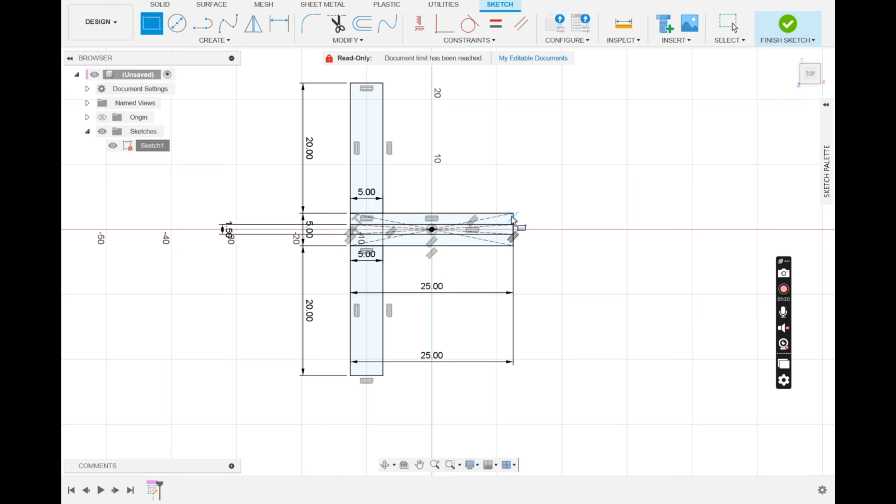The first step was to design and 3D print a small stand to hold the plate upright, allowing me to use a flatbed scanner. This provides a simple and effective way to capture the plate's shape before tracing it in CAD. What I learned quickly was that the two ends were a little distorted and didn't line up the way I thought they were going to.

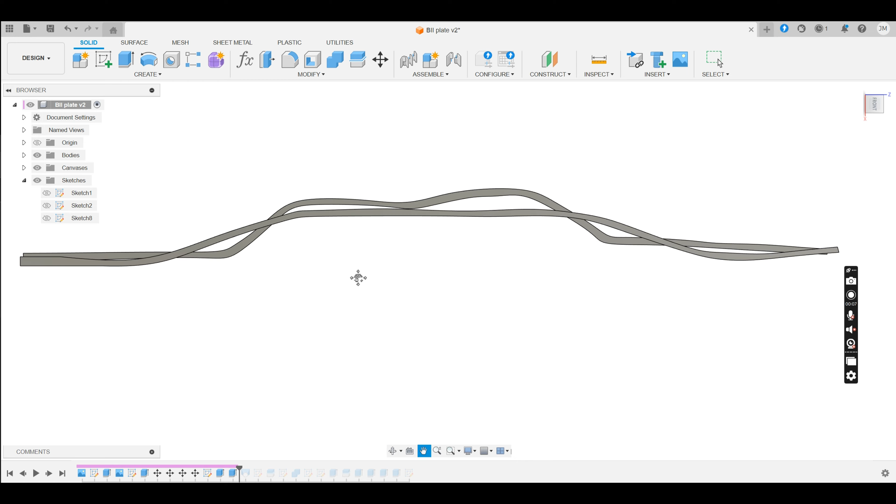So I extruded them to connect the two distances based on the gap I had measured and was going to try and figure it out as I went along. I knew I'd have to make some adjustments, but I figured I could play with this.

So I extruded it and then cut it in half because this big plate wouldn't fit on my printer. If you see right here how they're identical, it's because I made a mistake and printed one side twice.

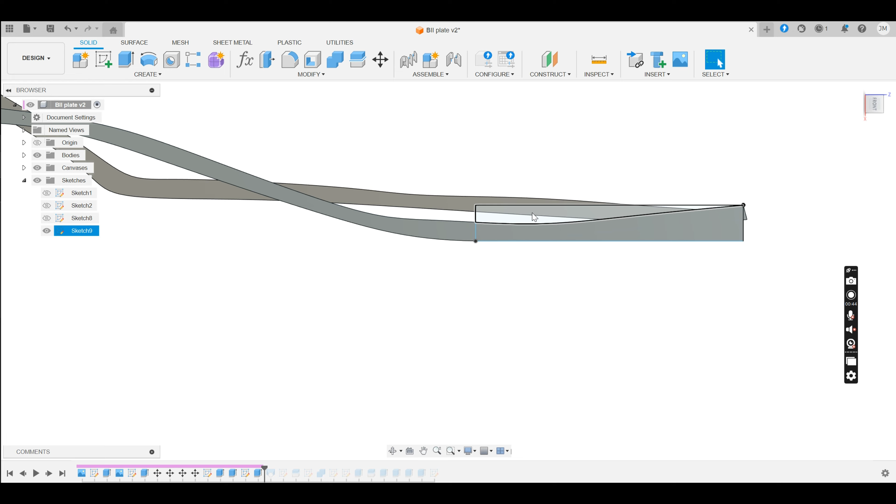What makes sense here is to follow the contours of the track as it is in place. To make it easier to print and make the design work better, I'm cleaning it up, and I realized I needed to make it a little thicker because when I printed the two pieces exactly the same, it was basically paper thin. So I made it thicker, and making it flat on top just made sense since it was going to be a plate going over it.

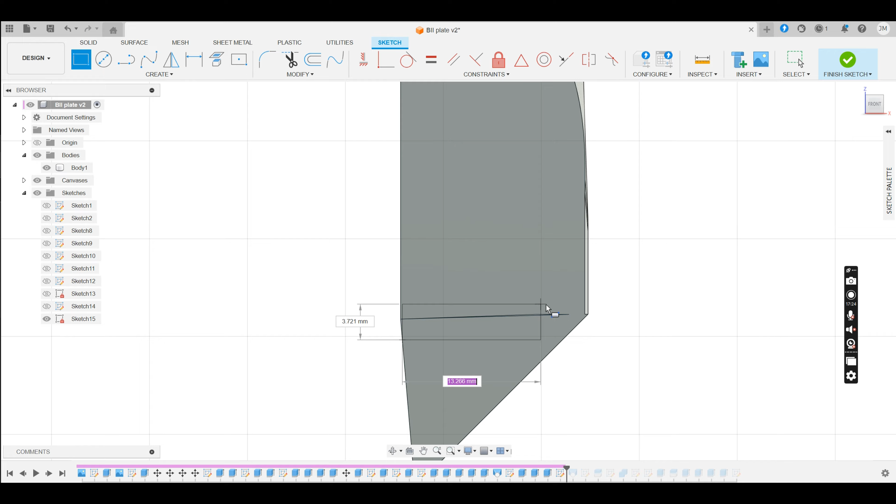And that's when I realized that maybe I was way over-engineering this and I could go with a much simpler design. Ooh, light bulb moment.

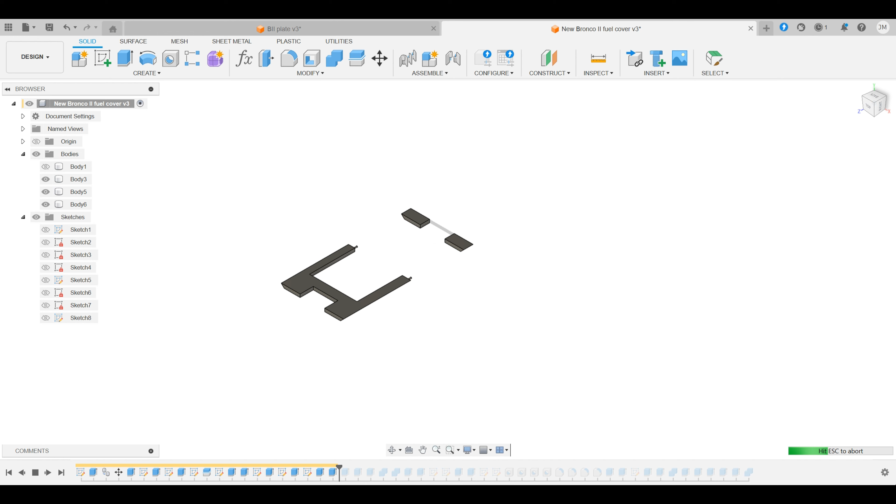So I threw out my entire earlier sketch and disregarded the plate I had taken out. I did some basic measurements off of the hole I was trying to fill and came up with a simple design that filled it with roughly those numbers. Then I created a design with two sections that would connect together and have a plug that would allow them to sit together but be spaced out.

This two-piece setup, slightly smaller than the measured hole, allowed me to position the ends flush against either side. By measuring the gap in the middle, I could determine the true overall dimension. I added that distance into the design, and I was good to go.

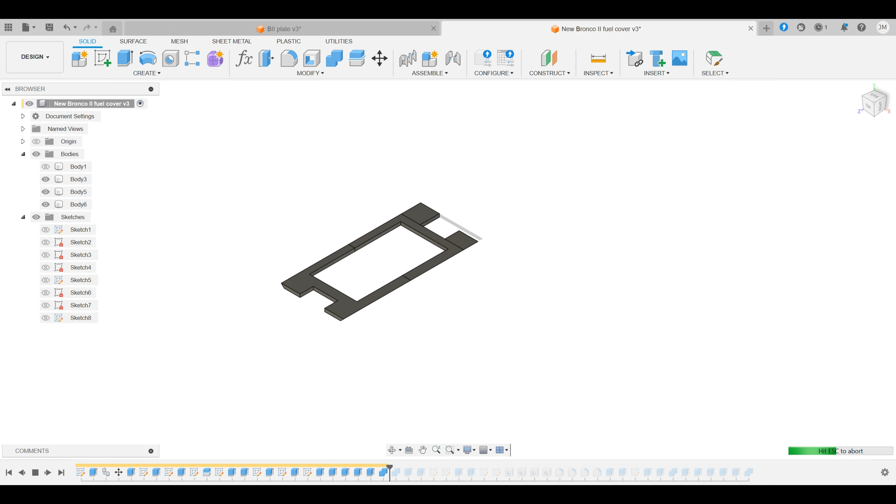I added the measured gap to the design at the midpoint, included a large registration tab to securely lock the two pieces together, and then added some screw holes for mounting. For no particular reason, I also rounded the edges before sending the final design to the printer.

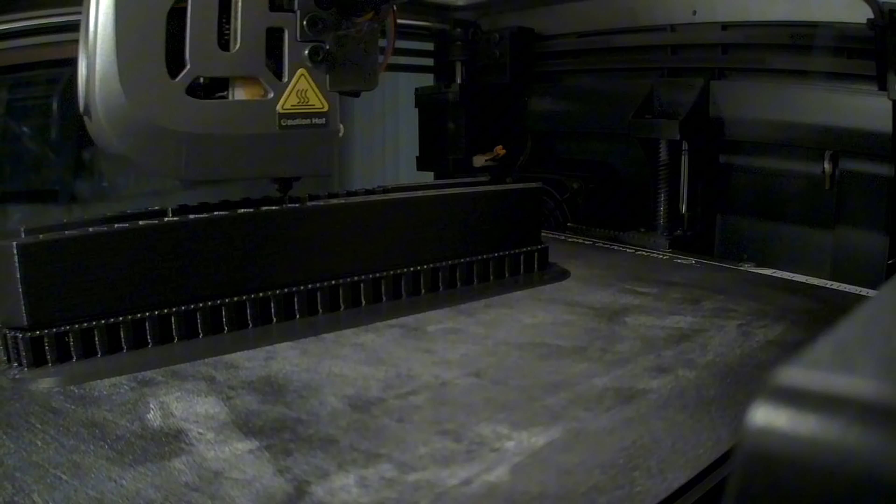Now, the first time it went to the printer, it failed about 20 minutes into it, so I had to start over. This print ran for about 8 hours. What you are seeing here is crunched down into just over 15 seconds.

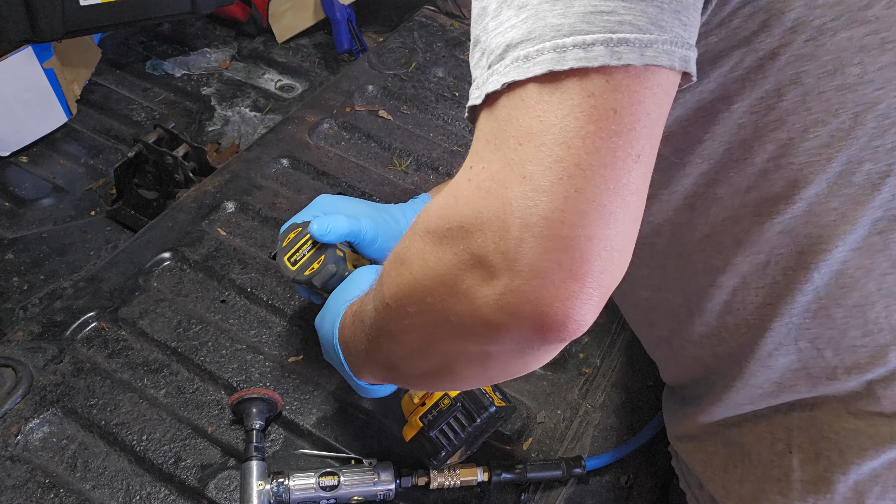This had a mix of RTV, household silicone, and Bondo. I started with a little die grinder, which did a bit but didn't take off some of the Bondo, and the paint didn't come off either. So I went to a wire wheel on a drill, and this did a great job. It got a lot of the paint off, took the Bondo off pretty easily, and the silicone wasn't that big of a deal since most of it scraped off. This gave me a decent surface to paint over for a little better adhesion.

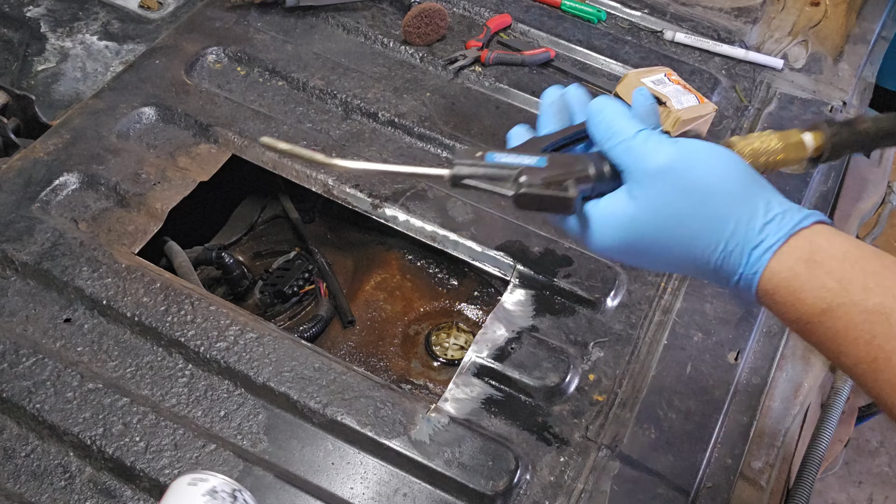After I took the old metal piece off, I noticed the fuel tank vent wasn't connected to the hose because it was broken. I cleaned it off as best I could, then grabbed some pliers and small needle nose pliers and started going at it. This was a pain, I had to play with it for a while, and eventually got a screwdriver to pry it out.

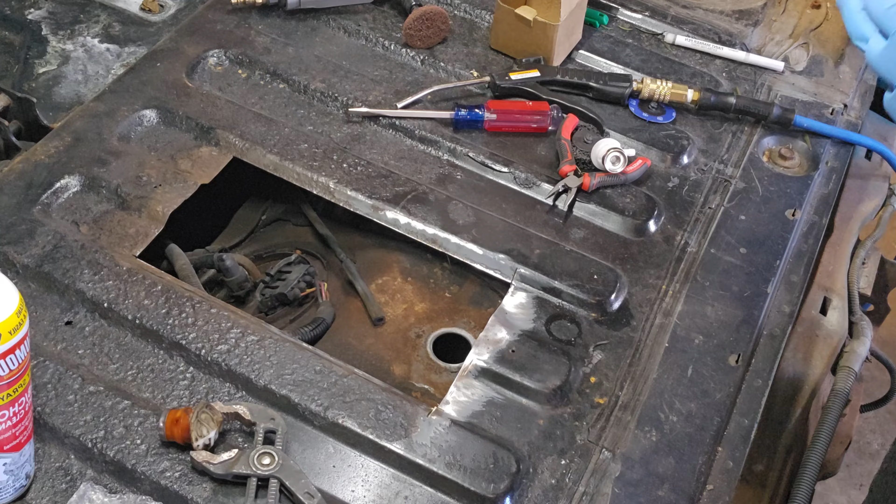The seal itself was actually in great shape. It definitely wasn't original, so somebody had replaced it at some point, and it was in pretty good shape when I went to put it back together. I had a hard time getting the plastic fitting to go back in, so I squirted a little Marvel Mystery Oil on it and it popped right in. Marvel's safe to use here because it can be put in the gas without any problems.

While I had this open, I cleaned off the top of the fuel pump and the whole top of the tank with some carb cleaner and an air gun. This will benefit me in the future if I ever need to get up here from underneath or get back in there — at least it's clean.

I took some more blue shop rags and put them on top of the fuel tank pump and the vent so it would protect them from overspray, then wiped down the edge where I'm about to paint with some cleaner to make sure we get all the oil and grease off. I'm not trying to do a great job here, just trying to prevent the heavy rust from hitting the bare metal.

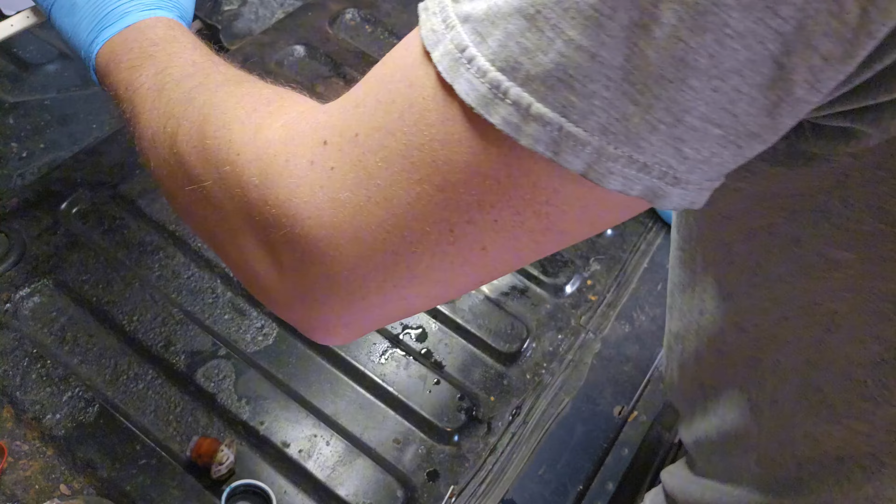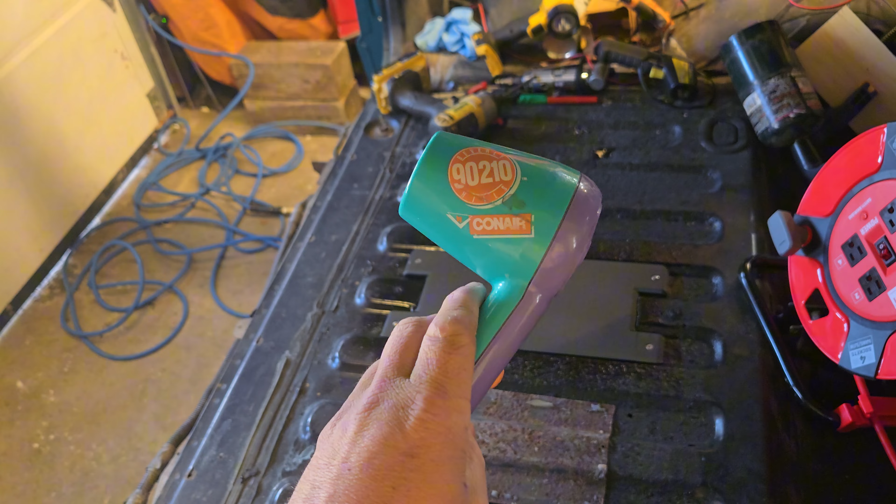One tool I cannot recommend enough is these little tiny hair dryers. This one I got for three dollars at a thrift store, but I actually have two of these — one is just brown, no branding on it. These are great, basically disposable. You can use them when painting or when you need to dry something. They're very small and fit in your toolbox nicely. Highly recommend picking these up cheap if you can.

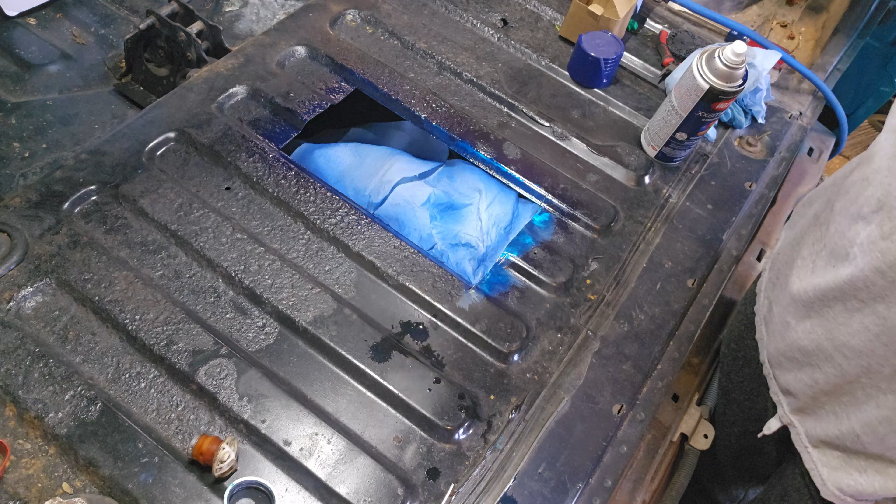I grabbed the closest can of spray paint I had, this blue color, and since I knew I was going to top coat it with black, I didn't really care about the color. This whole thing is rusted out, so I'm just trying to protect the bare metal and buy myself a little time. You can also cheat with spray paint and make it dry faster by using a little hair dryer like this.

Now just a quick top coat with black and we are ready to do a dry fit.

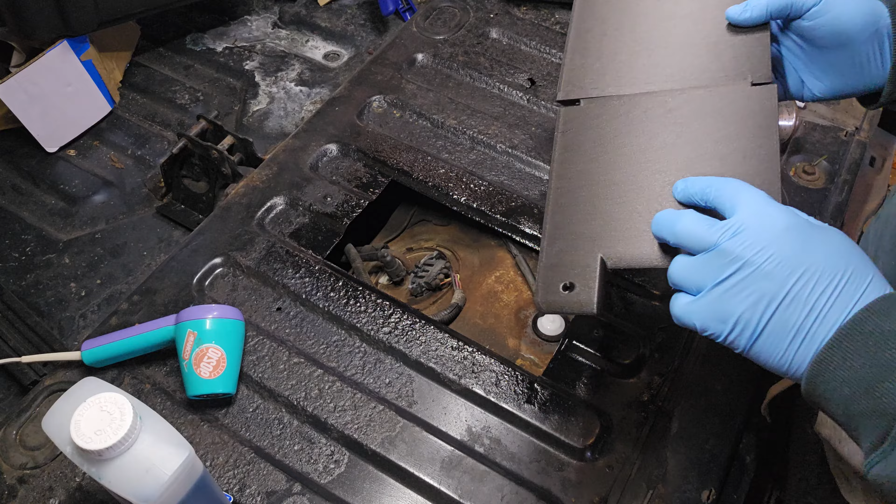I took the two pieces, put them together, and dropped it into the hole, looking all the way around to see how it feels and how everything looks. Everything is exactly perfect, no real big gaps — a really good situation here.

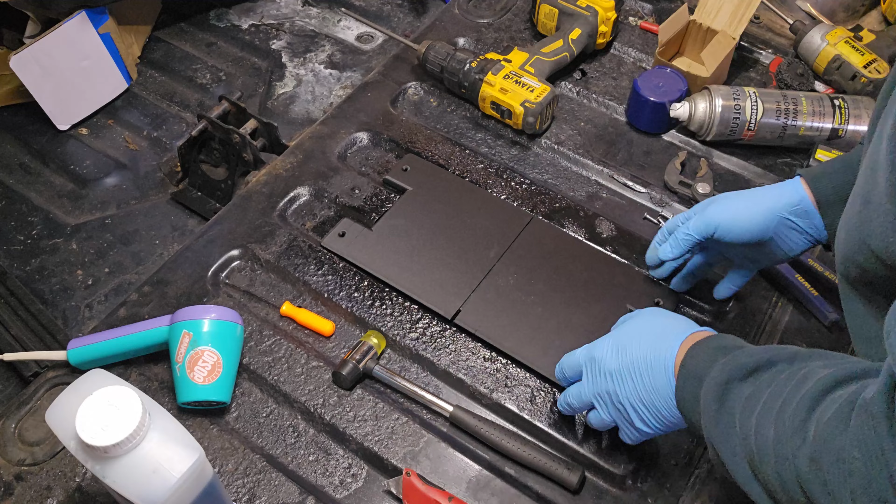Unfortunately I put too much glue in the seam and then it wouldn't come back together as one solid piece that fit nicely. I had to take it back out and, with a pick, scrape out all of the glue, or as much as I could, until I got it back together. Then with some tapping and a little shaking, I was able to wedge it into place.

This actually ended up being pretty okay. I was able to screw down the four corners, which made it fit really nicely. The glue spreading at the middle really made for a nice tight fit.

So I pre-drilled the holes and then put in some stainless steel screws that I had lying around for this project and put it together.

Now I am just using a standard hot glue gun here, which I've measured this tip to read around 180 degrees. Since PETG prints at approximately 220 degrees, the glue bonds really well, fusing the pieces together while also adding mass as a filler. As long as you go slow and use the tip to melt the plastic, it creates a strong and durable bond, at least in my experience.

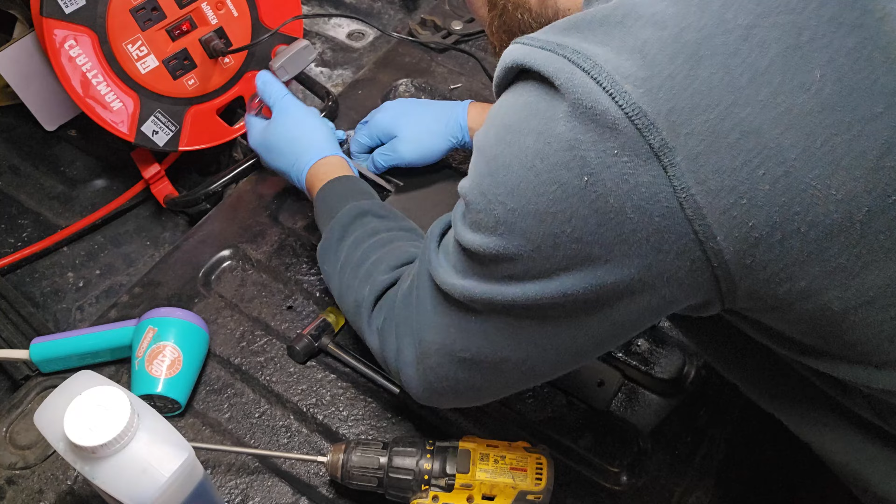So I did have a little bit of an issue trying to get this out, because the gap was a little bit bigger than I had designed. The glue in between them really opened it up ever so slightly, so it just barely doesn't fit inside of this. And it wasn't exactly square, which I knew, which was kind of the benefit of printing it in two pieces, is that it could square itself up.

So when I took it out and flipped it over, I just glued it the same way I did the other side. Now that the two pieces were really fused together, it was acting as one solid piece. There was really no flex in it, even at the seam.

So I had a little bit of a hard time getting it back into place. I had to use a small hammer and a flat blade screwdriver in order to kind of wedge it in there. But once I got it back in there and screwed it down tight, everything looked great.

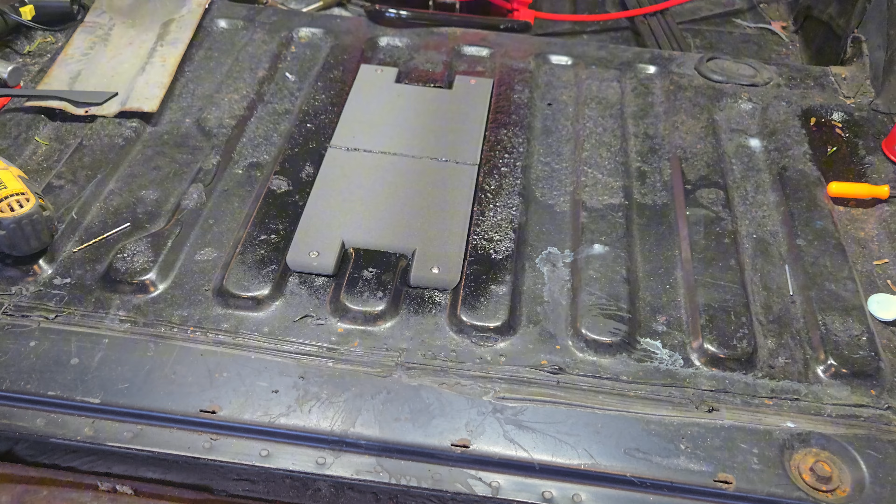Now, when we're looking at this as the final product, it's definitely not perfect. We can see over here, there's a gap that's a little bit bigger than I would want. This side definitely fits nice and tight, there's no gap, no anything. The side here is pretty good, it doesn't really have any play to it on either side. Really wedged in there, the seal is pretty good. So really this is the biggest gap all the way around.

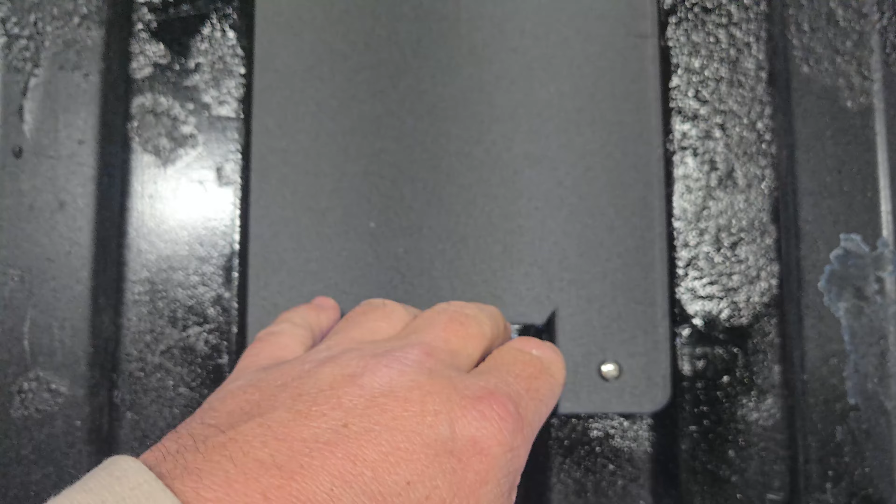Now, the problem is that when I put this in here, I had to slide it underneath and then drop it down. So I could hammer this down, hammer the metal part down, which would make that gap go away. But I'm worried that I'd never be able to get this out without cutting it, and that would kind of defeat the purpose. That being said, one of the great benefits of 3D printing is that I can just save this file and make a new one in a couple hours.

So this one took about 8 hours to print. It's about 20% infill in PETG plus CF. So I could just reprint this. If I had to cut into it again, I could, but I don't really want to get in here.

I'm hoping not to have any fuel tank issues. While I had this open, I did look in there and the fuel tank was pretty clean, so I don't think I'll have to get in here too often, but I do want it to be somewhat removable so I can get in there if I ever needed to.

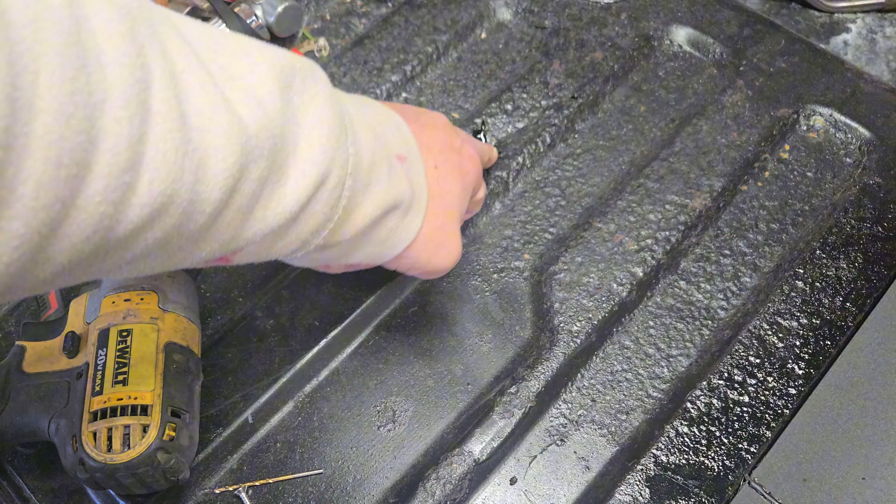Now obviously this floor is not in the best shape anyway, definitely could use some work. There's quite a few holes that are poking through here, and it's definitely not going to be sealed up tight. Now the exhaust does come out the side, I haven't welded that in yet, but as a future project that will be to put the exhaust on, it'll come out the side. So not too worried about that.

Overall though, I'm really happy with how this came out. It really fits perfectly on the sides, considering I just guessed on the angles, I didn't measure anything. Melting the seam in with some hot glue has really kept it perfectly rigid. There's no flex here, and then screwing it down will hold it.

Now, if this was a better situation, or if the floor was in better shape, I probably would RTV this into place, and I might do that anyway because there's some big holes. And I might use a smoke machine to see where the holes are and try and plug them as best I can to stop it.

But realistically, this whole floor needs to be cut out and replaced at some point. But that's not really what I'm trying to do right now. I'm trying to get this on the road, get it completely back together, and then we can start doing the improvements that are needed like that. Because if this sits in the garage forever, I'm never going to have the motivation to finish it, and I don't want to do that.